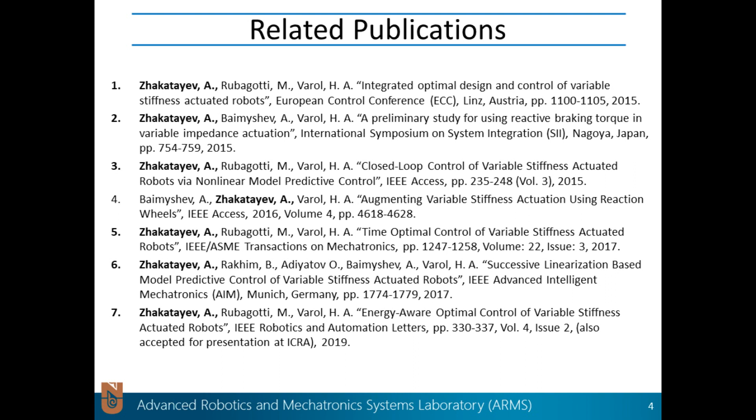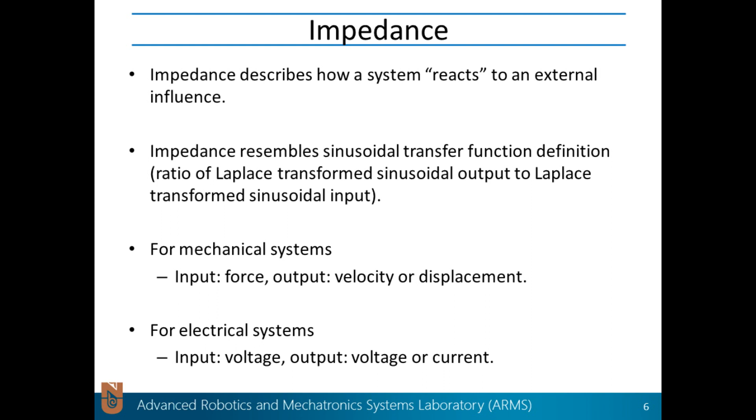So, what is impedance? Impedance in general describes how a given system reacts to external influence or input. In other words, it describes how a given system responds to external stimulus. We can say that it resembles the sinusoidal transfer function definition, similar to the ratio of Laplace transform output to Laplace transform input.

For example, if we talk about mechanical systems, then as input we might have a force, and as output we might have, for example, velocity and displacement. So if we focus on mechanical systems, then we have to define the mechanical impedance.

Let's imagine we have a mechanical system, then we apply a sinusoidal or harmonic external driving force as input. And then as a response from the system, we get a certain sinusoidal or oscillatory steady-state displacement. Then we can define mechanical impedance as the ratio of this driving force to the resultant steady-state displacement.

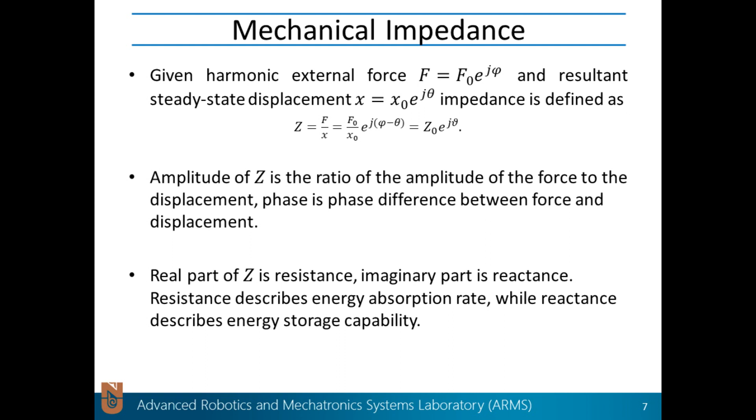In general, this mechanical impedance is a complex number, and the amplitude of this complex number is equal to the ratio of amplitudes of force to displacement, while the phase is equal to the phase difference between input force and resultant output steady-state displacement. The real part of this mechanical impedance is called resistance, and it usually describes the rate of energy absorption, while the imaginary part is called reactance and commonly describes the energy storage capability.

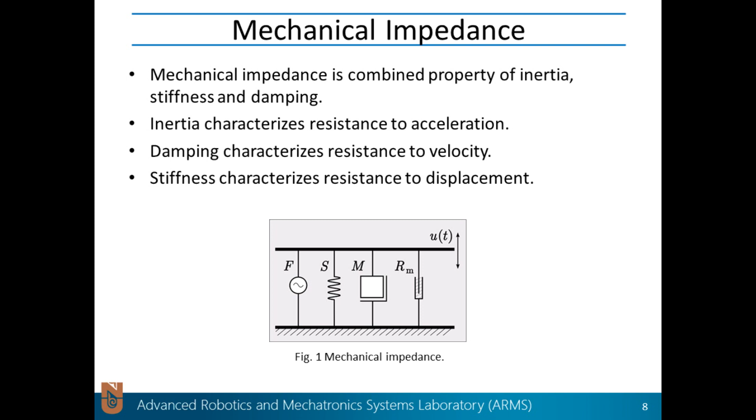Given an arbitrary or general mechanical system, the mechanical impedance is defined by the properties of inertia, stiffness, and damping of the system. In other words, these three properties together define the mechanical impedance of the system. Inertia describes the resistance to acceleration, damping describes resistance to velocity, and stiffness describes resistance to displacement.

If for a given mechanical system we can vary any of the three properties, in other words, if we can vary inertia and/or stiffness and/or damping of the system, then essentially we can vary the mechanical impedance of the system. So mechanical systems with variable mechanical impedance are systems in which any of the three properties can be varied. Currently, variable impedance actuated robots are robots in which we can alter or vary the mechanical impedance of the joints of the robot.

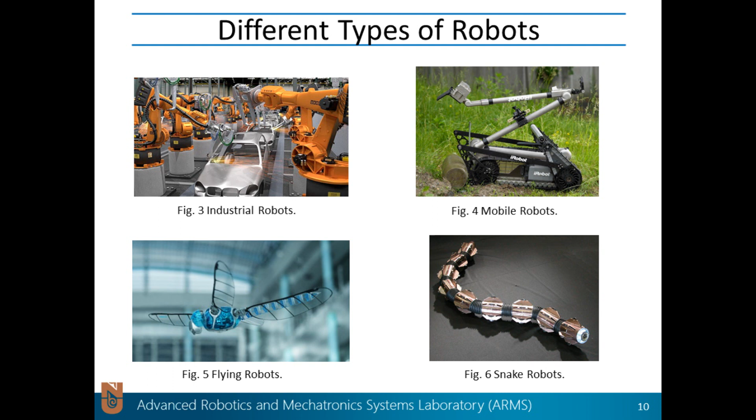Currently, we have all sorts of robots. For example, we have industrial robots, mobile robots, flying robots, snake types of robots. So we have all sorts of robots. One of the important goals of the robotics field is to design such a robot which would move with the same agility, mobility, and dexterity as humans and animals move.

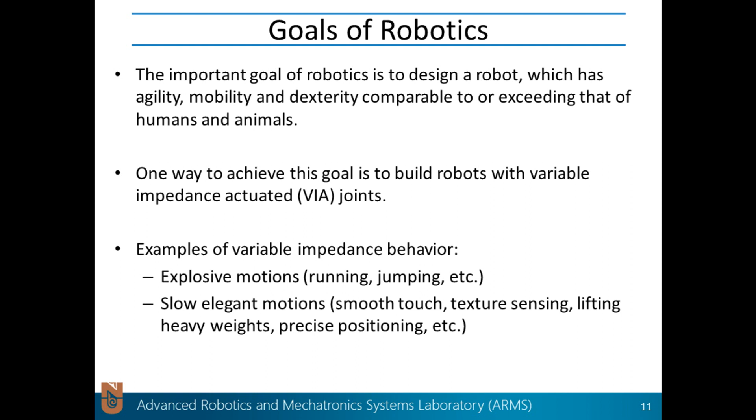One way to achieve this goal is through so-called variable impedance actuated robots or variable impedance actuated joints. Examples of variable impedance behavior include explosive motions like running, jumping, or throwing, and slow, elegant motions like smooth touching, texture sensing, and so on.

On this slide, we summarize the information about position control robots, or so-called stiff joint robots. The main disadvantages are the following: they are not safe, and they are not energy efficient. In other words, they spend energy in all parts of the motion trajectory. They are not compliant, meaning they can't vary their mechanical properties depending on the task, and they can't perform explosive motions.

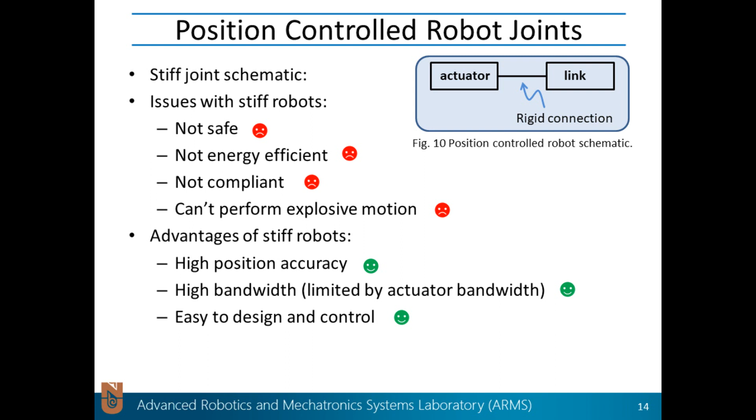While position control robots have the following advantages: high position accuracy, high bandwidth, meaning they can follow sinusoidal signals with high frequency, and they are relatively easy to design and control. Here you can see the schematic of rigid or position control robots. In these robots, the actuator is directly connected to the link through a rigid connection.

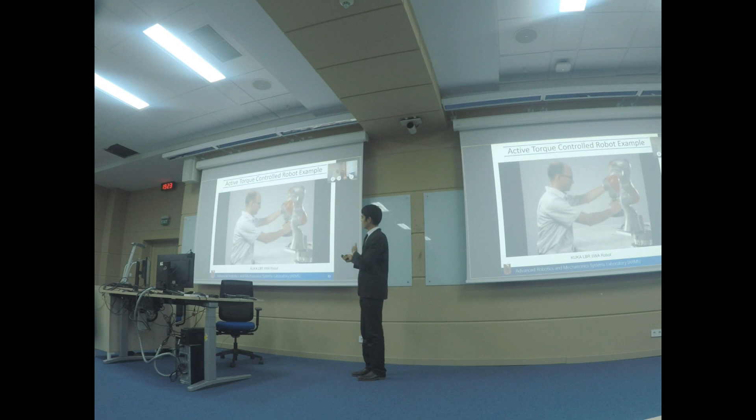This slide summarizes the main advantages and disadvantages of the active torque controlled robots. These robots are also called active variable impedance actuated robots, because the variable impedance behavior is achieved by active means, by actively controlling the force and torque through the force and torque sensors.

So these robots still have the following disadvantages: they are not energy efficient, they can't perform explosive motion, and they can also be unstable. The advanced controls usually employed in these robots can become unstable under certain rare conditions.

But these robots have the following advantages: they are now safe, they are compliant. In other words, you can program them to behave with any desired apparent mechanical impedance, and they still have high position accuracy and high bandwidth.

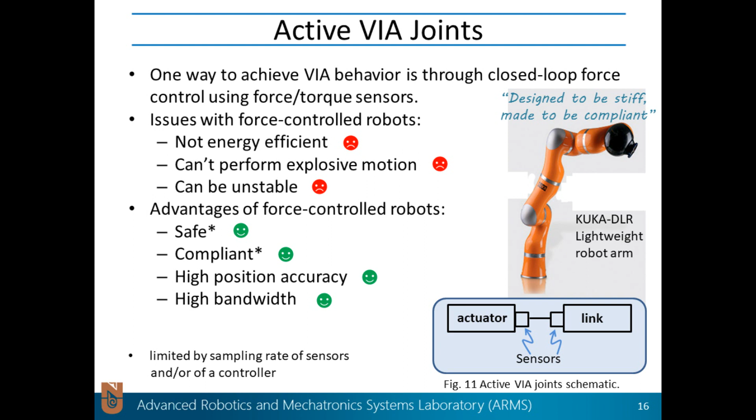This diagram summarizes the schematics of these robots. In these robots you still have the rigid connection between actuator and link, but now there are many sensors, for example acceleration, torque, and force sensors incorporated into the actuator and link, so that using the information from the sensors we can detect when a collision happens and modify the robot motion accordingly.

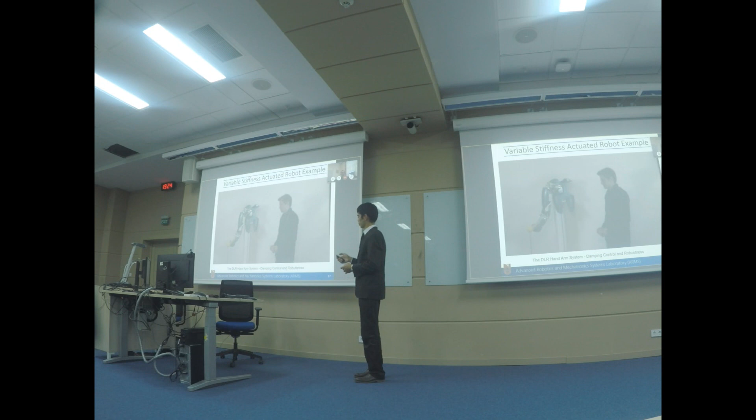This slide contains a video where we can see the advantages and unique features of the variable impedance or variable stiffness actuated robots. For example, you can see that when the robot is hit by a bat, there is essentially no damage to the robot.

Here we summarize the information about the variable impedance actuated robots. These robots are also called passive variable impedance actuated robots, because here the variable impedance behavior is not achieved by active means or by imposing that behavior. It's an intrinsic property of the joint or the robot, so it's a passive variable impedance behavior.

So these robots have the following disadvantages: they have limited position accuracy, they have limited bandwidth, and it's difficult to design and control them because you have more elements in the robots.

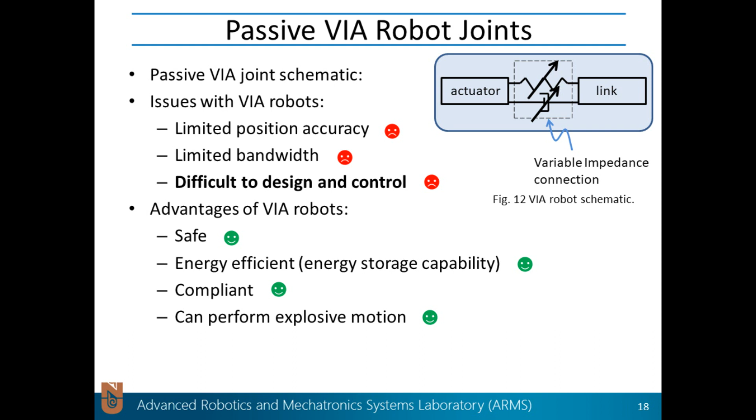So here you can see the schematic diagram of the variable impedance joints or robots. In these robots, the actuator is decoupled from the link. In other words, it's not directly connected to the link.

So again, in passive variable impedance joints, the variable impedance behavior is something which is intrinsic to them. It's kind of an internal property of these robots. It's not something which is external or imposed, as, for example, in active torque control robots. Therefore these advantages that we mentioned before are intrinsic properties of these robots, and they don't lose them if, for example, control breaks.

One of the main research directions in the robotics community is to design and control the variable impedance or variable stiffness actuated robots.

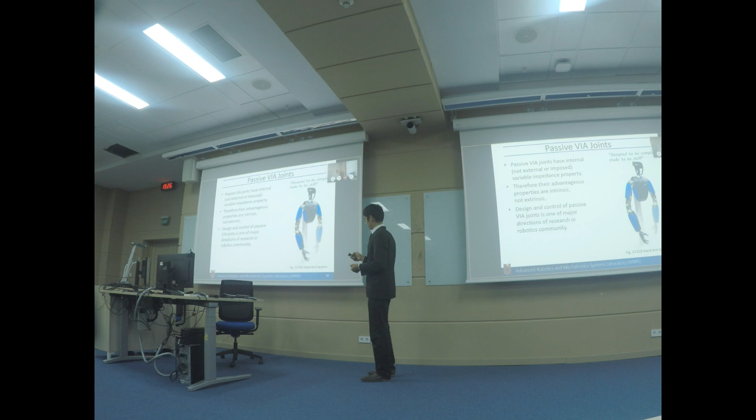Variable impedance actuated joints have application in multiple fields and areas. For example, they're used in prosthetics, in surgical robots, in designing exoskeletons, and in applications related to interaction with humans, in social robotics.

Variable stiffness actuated robots is a subgroup, or one branch of the variable impedance actuated robots. They also have the advantages of the variable impedance actuated robots. Specifically, these advantages are the following.

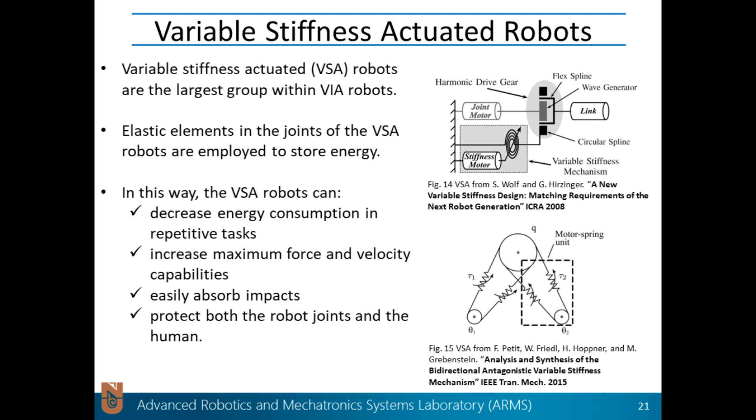Variable stiffness actuated robots consume less energy because they consume energy at one cycle of the motion. Then they can store the energy in the nonlinear elastic elements, and then release that energy at the other cycles of the motion.

Variable stiffness actuated robots have increased maximum force and velocity capabilities. Due to the energy absorption abilities, VSA robots can also easily absorb external impacts or shocks, and again due to the presence of nonlinear elastic elements, these robots can protect the robot joints and the humans in case of collision.

The variable impedance or variable stiffness actuated robots have the following kind of problems or difficulties associated with them. Firstly, design gets more complicated, due to the presence of additional nonlinear elastic and or nonlinear damping elements, and the presence of additional actuators.

Also these robots have limited position accuracy, and reduced mechanical bandwidth compared to, for example, position control robots. They also have more complex dynamics, and the parameter identification and task planning of these robots is challenging.

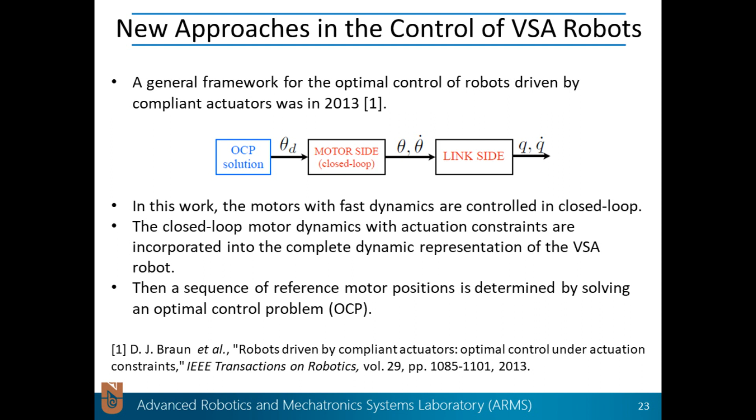A research group from Germany proposed the following control methodology to control variable stiffness or variable impedance actuated robots in 2013. They proposed to use an optimal control problem formulation. They take the system dynamics, and also the dynamics of the motor side, provide them to the optimal control problem formulation, specify the task, then solve the optimal control problem and obtain the optimal control inputs, which they feed to the system to get the desired behavior.

The control problem of variable stiffness actuated robots can be formulated as an optimal control problem, with the purpose of solving the following optimization problem: here you have the cost function J, sometimes called the objective function, then we have the system dynamics, represented through the function f, then constraints on the state x, and bounds on the input u.

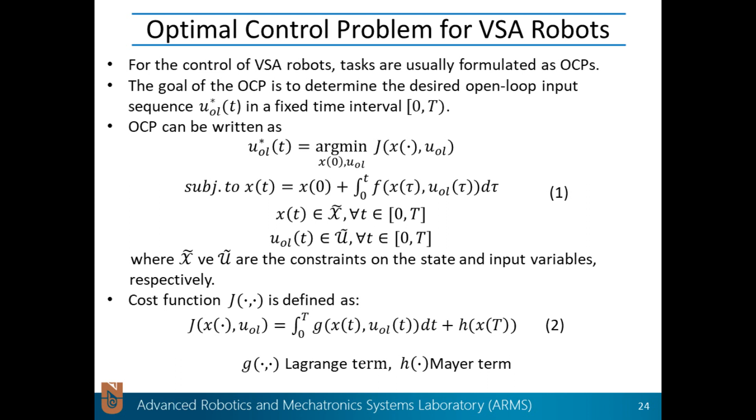Usually the cost function consists of two terms: one is called the Lagrange term, the other is called the Mayer term, which also describes a kind of end term. By solving this optimal control problem, we can obtain the optimal control inputs to the system.

Our approach to control variable impedance or variable stiffness actuated robots is the following. We propose to use the model predictive controller to close the loop, controlling these robots in a closed loop manner. The MPC controller takes information about the current state of the system, and we provide it with the solution from the optimal control problem as a reference. Model predictive control compares the current state with the reference state, then recomputes the optimal control inputs and feeds them to the system. This way, we achieve closed loop control.

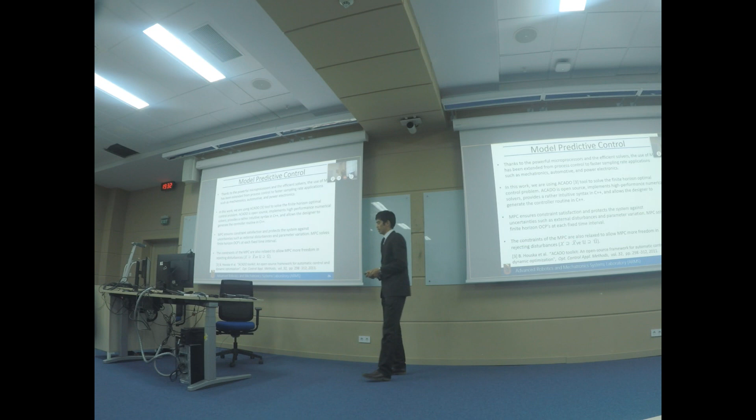Model predictive control was first developed in the chemical industry, and it was firstly applied to chemical processes. But due to rapid advances in microprocessors and electronics, now we can use model predictive control for processes with fast dynamics, such as aerospace, mechatronics, automotive, and power electronics applications.

In this work we used the ACADO toolkit, which is open source code to solve optimal control problems and to generate the model predictive controller. It has easy syntax in C++.

The main advantage of MPC is that it satisfies the system constraints, and it tries to get the system behavior as close as possible to its reference trajectory. Usually for MPC we have to relax the constraints compared to OCP, optimal control problem, so that it can reject disturbances.

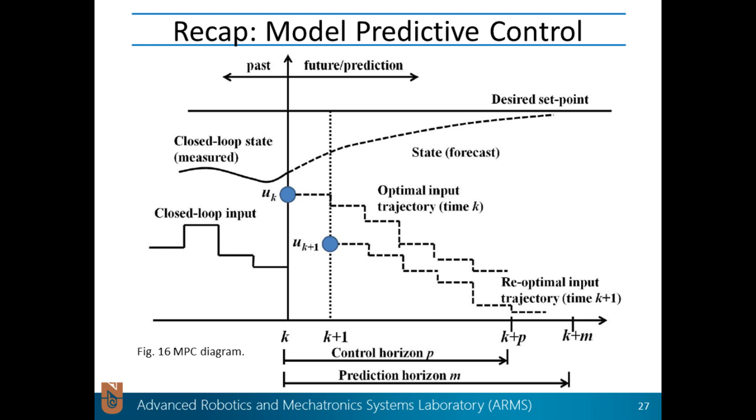It computes, within a limited horizon duration called the prediction horizon, the behavior of the system. Then, based on that, it calculates the optimal control inputs which would try to bring the system as close as possible to the desired reference trajectory. It computes these control inputs usually for the control horizon duration, and then we give just the first optimal control input to the system. Then we move to the next sampling time, where this process repeats. So essentially, MPC at every sampling time recomputes the optimal control inputs.

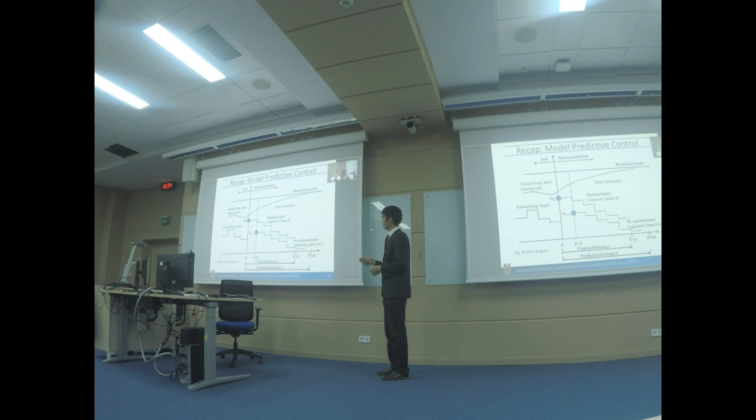So how do we describe the dynamics of variable impedance or variable stiffness actuated robots? Usually for traditional rigid robots or position controlled robots, we just model the dynamics of the link side, while the dynamics of the actuator is usually lumped into the dynamics of the link side. So inertia and other properties of the actuators are lumped or incorporated into the properties of the link.

While for variable stiffness or variable impedance actuated robots, we have to decouple them, we have to consider them separately. So we have one equation which describes the dynamics of the link side, then we have another set of equations which describe the dynamics of the actuators. So we have essentially two different sets of dynamical equations, which describe respectively the dynamics of the link and actuator side.

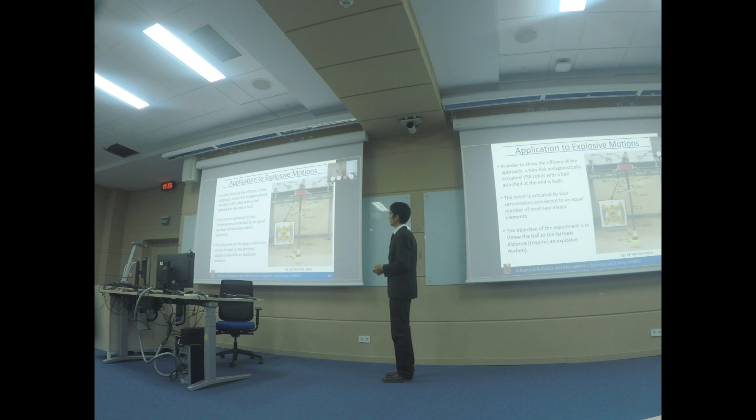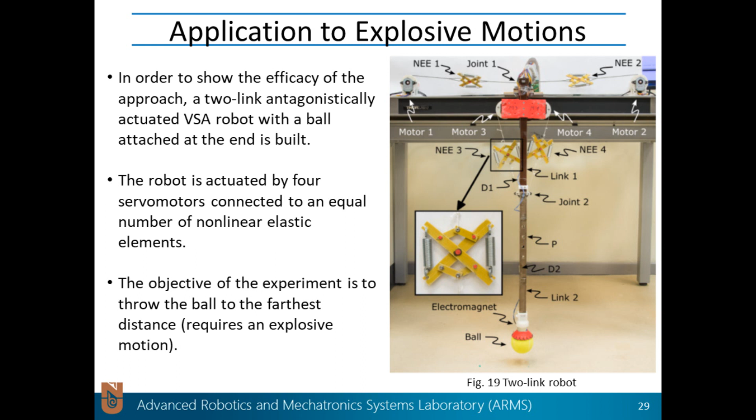In order to test the efficacy of our proposed approach, we built the following two-link variable stiffness actuated robot. The robot consists of two links, 4 position-controlled motors, 4 nonlinear elastic elements, and 6 encoders. Each actuator is connected to the links with a nonlinear elastic element, and the objective of the robot is to throw a tennis ball, attached at the end effector, to the farthest distance possible.

Then we formulate the optimal control problem for the duration of 4 seconds. This OCP was solved in 16 minutes, with a sampling time of 10 or 20 milliseconds.

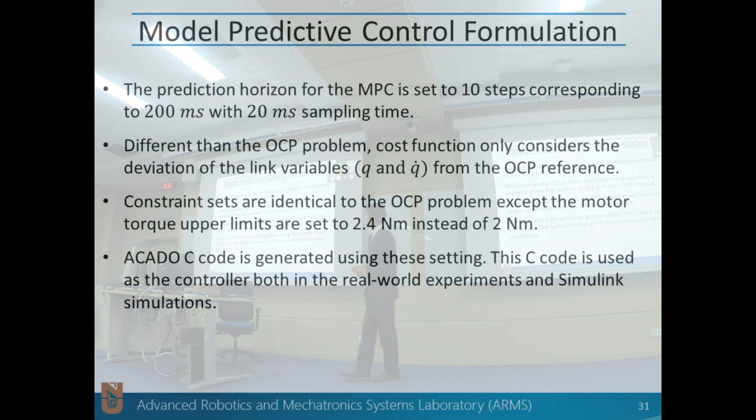Then we generated the model predictive controller, and for that we set the sampling time to 20 milliseconds, and we set the horizon time to 200 milliseconds. So we had 10 sampling times within the prediction horizon.

We slightly enlarged, or slightly relaxed, the constraints on the system. For example, we slightly increased the torque limit for the motors, and then we generated the MPC controller using ACADO C code. We also provided as a reference to the MPC only link position and velocities - we didn't provide any actuator link positions and velocities as a reference.

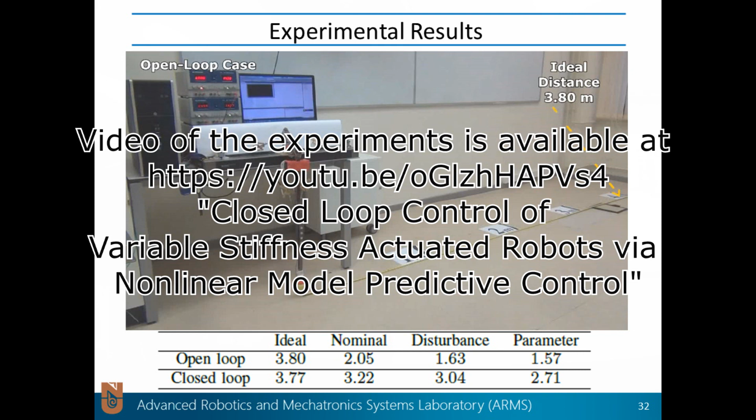So on this slide, you can see the video of the experiments that we performed in the lab, and here you can see the actual distances that we achieved. In the open loop scheme, in the ideal case in simulations, we would achieve a throwing distance of 3.8 meters, while in closed loop we'd achieve a distance almost close to that - only 3 centimeters less.

Then in the actual experiments, in the nominal case, in the open loop case we obtained a throwing distance of 2 meters, while in the closed loop we obtained a throwing distance of 3.2 meters, which is much larger than the open loop case. Then we performed additional experiments where we applied external disturbances and changed the parameters of the system. In both cases, the closed loop controller with MPC outperforms the open loop controller.

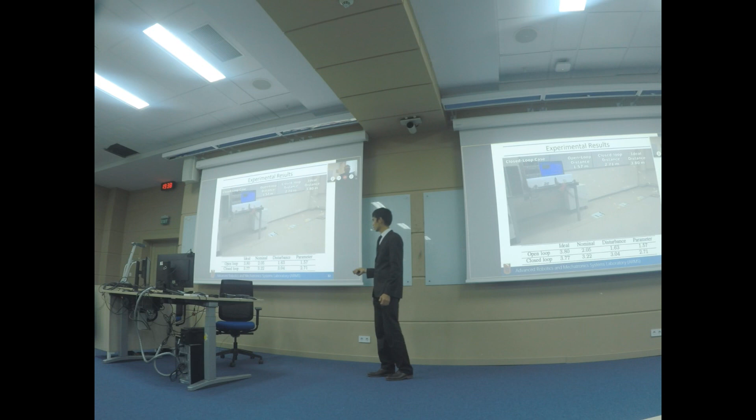But of course, we can apply MPC to the control problem of variable impedance actuator robots only if it satisfies the following condition: the MPC should be able to solve the finite horizon optimal control problem within the sampling time.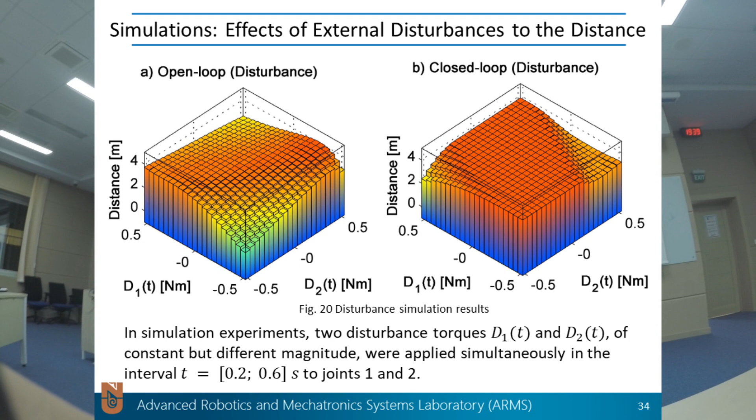As external disturbance, we used an external torque in simulations. You can see that in most cases, the closed loop controller compensates the effect of the external disturbances, and only in extreme cases does its compensation fail. But in the open loop case, only at specific values of the external disturbance does the system performance not degrade - in all other cases it degrades.

Similarly, we perform simulations for the parameter variation case. In other words, we vary the parameters of the system so that the controller had different system values for the system parameters than the system in simulation. So we obtain the following plots.

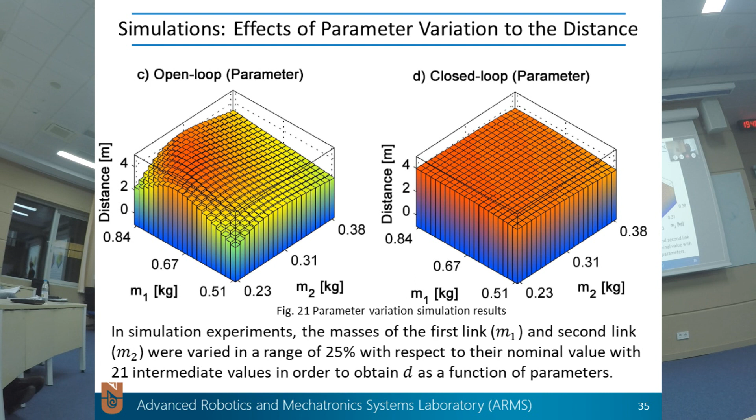Here you can see the open loop and closed loop system performance when parameter variation of the system takes place. You can again see that the closed loop controller, in most cases, manages to compensate the effect of the different values of the system parameters, while the open loop controller cannot do that.

The next task that we considered was related to the integrated optimal design and control of variable impedance actuated robots.

Usually, the design and control problems of systems are considered as separate or decoupled problems. For example, designers design a system and then provide it to control engineers, who try to make it controllable. But system design usually affects the controllability properties of the system, and controllability in turn might affect the design. In other words, control and design are coupled problems and should be considered together.

Traditional design methods don't allow considering these two problems together, so usually the design process is iterative: engineers design the system step by step, trying to improve it at each stage. But this process doesn't guarantee that at the end we get the optimal design. So we propose to solve the optimal design and control problem together using optimal control problem methods, which we call the integrated optimal design and control problem.

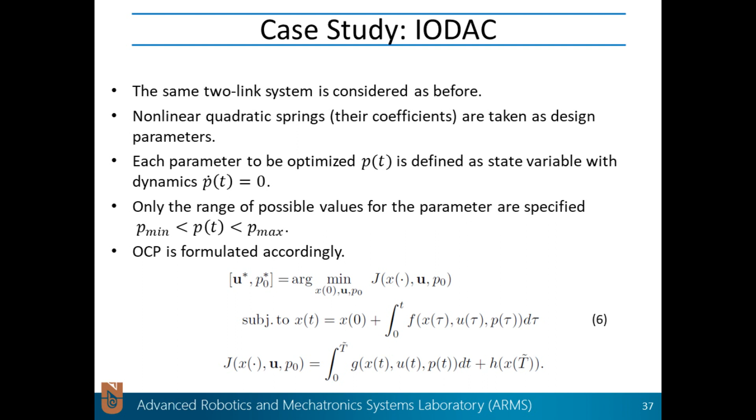As a case study for this task, we considered again the two-link variable stiffness actuated robot. For this simulation, we considered the nonlinear elastic elements as quadratic springs, with the constant considered as a design parameter. To find the optimal values for these design parameters, we imposed the following conditions: these parameters are states of the system whose time differential equals zero, so they're constant, but their initial value is unspecified—we just set it within a certain interval—and then formulated the following optimal control problem.

Here our cost function is a general cost function, but it now also contains the parameters to be optimized, P. Then we have the system constraint, the system dynamics.

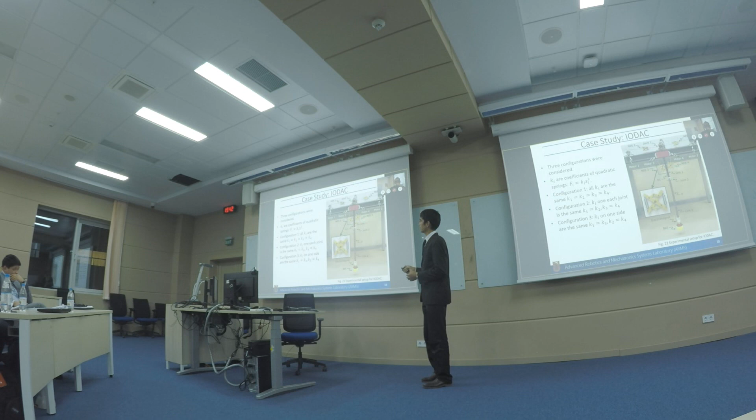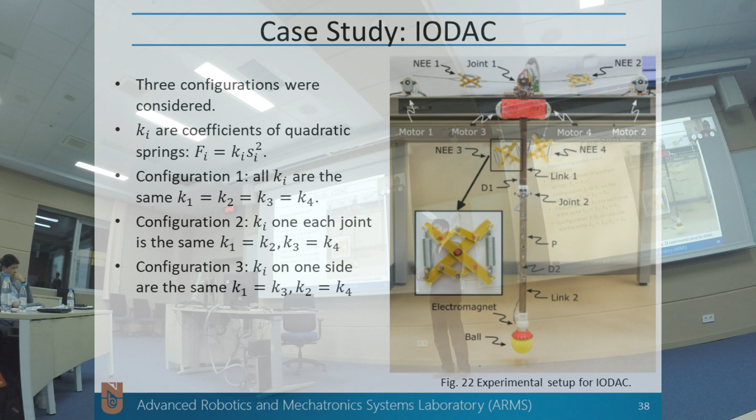As a case study for this task, we considered the two-link system, assumed to have quadratic springs, and we considered three different configurations. In the first, all quadratic springs were equal, so the coefficients were the same. In the second, the quadratic springs on one joint were the same but different from those on the second joint. In the third, the quadratic springs on one side of the robot, for example the right side, were the same but different from those on the left side.

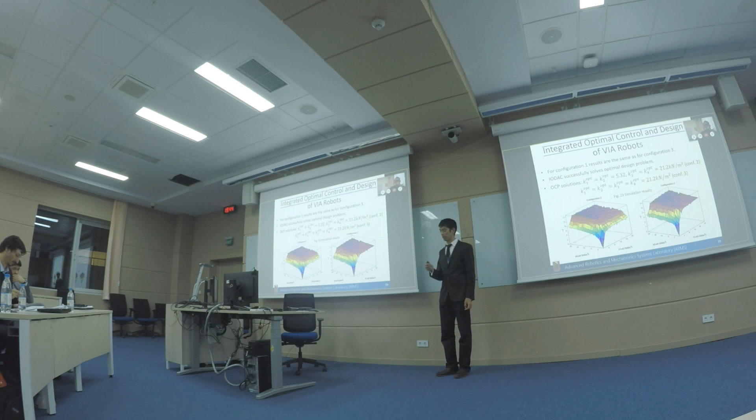The next project we considered was related to the reaction wheel integrated variable impedance actuator robot. Reaction wheels are commonly used in the aerospace industry, for example in satellites, to control and stabilize attitude, and they are also considered additional torque and energy sources. So we propose to incorporate reaction wheels into variable impedance actuator robots in order to increase force and torque capabilities and to increase bandwidth.

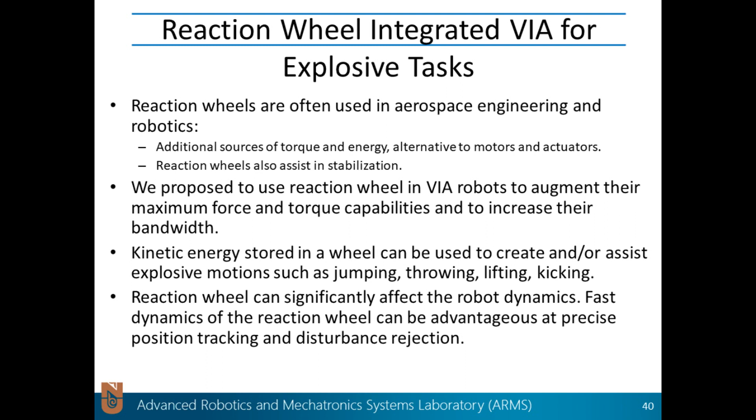This is due to the fact that reaction wheels store kinetic energy and can then release that energy, which is very helpful in performing explosive motions such as jumping. Reaction wheels also have fast dynamics, so they can assist variable impedance robots in precise position tracking and in disturbance rejection.

In order to test our control approach, we imposed the following task for the robot: to throw the ball to the maximum possible distance. We performed experiments for 3 different times, as you can see from the table. Robot motion was imposed at 1 second, 1.5 seconds, and 2 seconds, and here you can see the distances that we achieved.

You can see that the reaction wheel with variable stiffness actuated robot together, the two systems combined, give the maximum distance in all cases, while the VSA only case and reaction wheel only case give lower distances.

For example, from this diagram you can see that as the time of motion of the robot is increased, the thrown distance of the ball also increases, but then it saturates. These results confirm that reaction wheels enhance the dynamics of variable stiffness, variable damping, or variable impedance actuated robots.

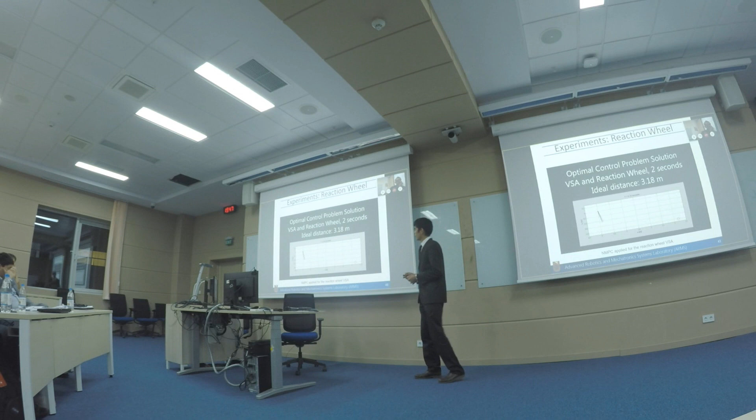On this slide, you can see the video of the experiments that we performed for this reaction wheel augmented variable stiffness actuated robot.

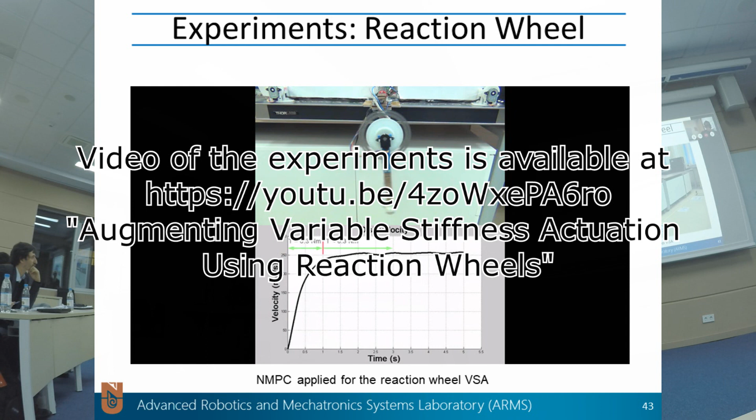The next task that we considered was related to time optimal control of variable impedance actuated robots. Often in industry, it's necessary to perform a certain task in the shortest time possible, or minimum time possible. The control sequence which would minimize the time of motion usually involves trial and error, an iterative process.

But we propose to use an optimal control problem to solve this time optimal control problem. Our approach takes into account the system dynamics and the constraints of the system, so that the time optimal control problem is solved without violating the system constraints.

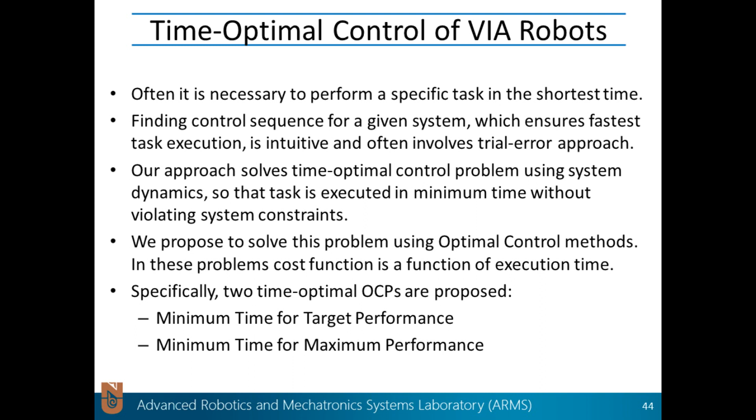Specifically, we propose two time optimal control problems: one is called minimum time for target performance, and another is called minimum time for maximum performance.

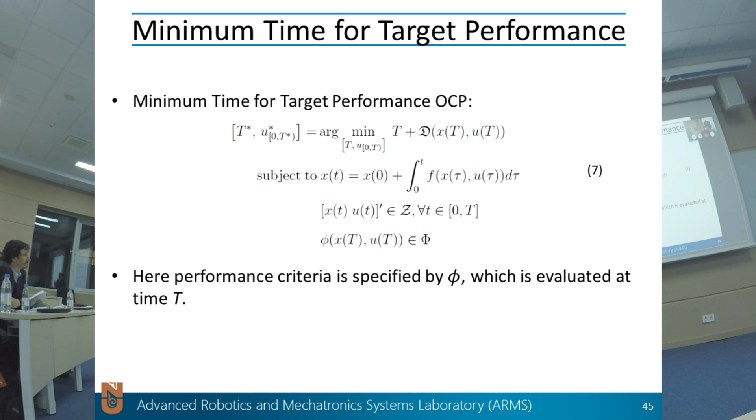For the minimum time for target performance optimal control problem, we have the following problem formulation. As the cost function, we have time of motion plus any function of the system states at the last moment of, for example, robot motion. Then we have the system dynamics, constraints on the system states and control inputs, and a constraint on system performance, specified by the letter phi. Performance criteria is imposed as a constraint of the system.

In other words, we just maximize the system performance, and then in the next sub-problem we want to achieve a performance which is maximum or slightly less than maximum but close to it, while minimizing the time of motion. So minimum time for maximum performance is achieved by solving two suboptimal control problems: first maximizing the performance, then minimizing the time of motion while imposing the performance as a constraint.

We introduce the tolerance parameter delta, which accounts for errors of computation or sometimes the tolerance of the system. This minimum time for maximum performance optimal control problem can be solved by the time axis grid method, which applies to any time optimization problem, or by the bisection method, though this is only valid for systems in which performance is a non-decreasing function.

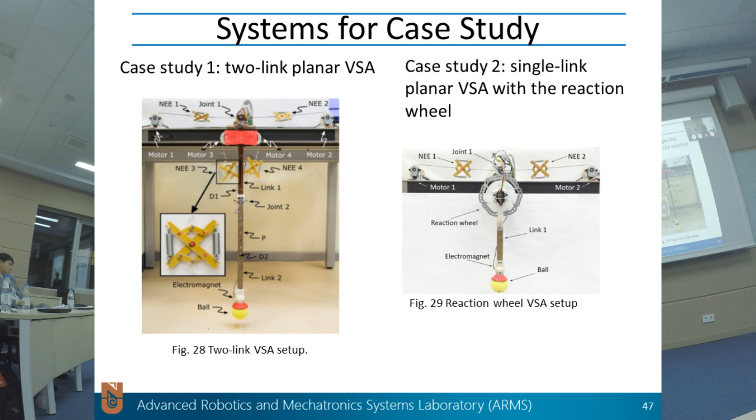As a case study for this task, we used two different systems. The first system is the two-link variable stiffness robot, and the second system is the single-link variable stiffness robot with the reaction wheel.

You can see that for three different set values for ball thrown distance, we have the corresponding times. T gives the time of robot motion, and D gives us the time of flight of the ball after the system throws it and before it hits the ground. Then we have the combined times. On the lower side, you can see the diagram of the two-link trajectories and the corresponding velocities.

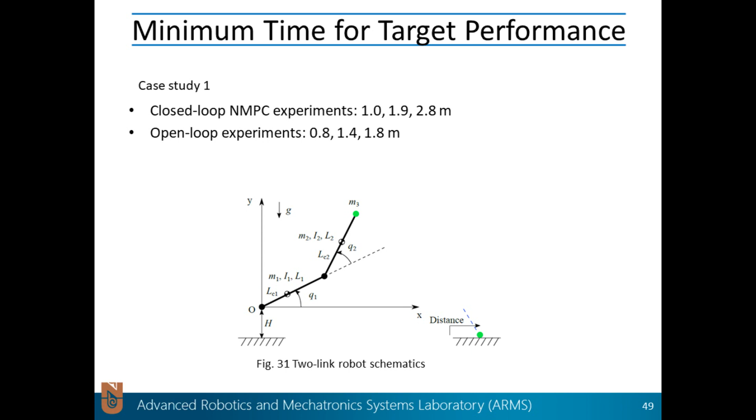Here we present the results of simulations for minimum time for maximum performance optimal control problem for two systems: double link system and a single link reaction wheel system. This problem was solved by two methods for each case study. One method is a time axis grid method, the other is bisection method.

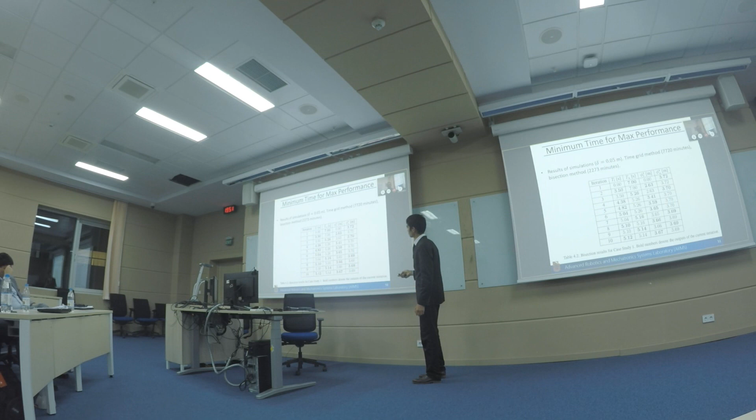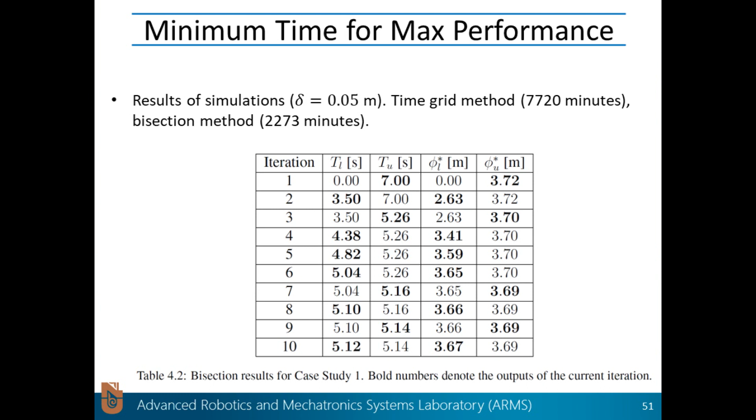On this slide, you can see the results of the bisection method applied to solve the minimum time for maximum performance problem, applied for case study 1, the double link system. With bold letters, we indicate the solution of the current iterative step. You can see that within 10 iterations, we get the optimal value for the minimum time.

The next task that we considered was the energy optimal control of variable impedance actuated robots. In most applications in industry, it's desirable to reduce energy consumption. Commonly, the reduction in energy consumption or energy efficiency is achieved by trial and error approach. We propose to use an optimal control problem to solve this energy optimization, ensuring that system constraints are satisfied.

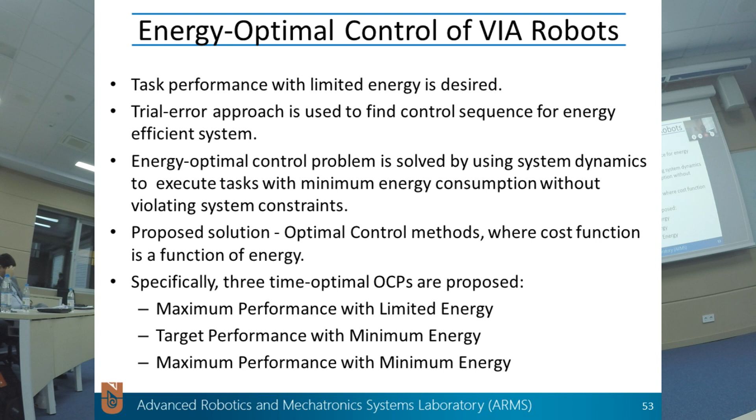Specifically, we formulated and propose to solve three different energy optimal control problems. One is maximum performance with limited energy, another is target performance with minimum energy, and the third one is maximum performance with minimum energy.

In order to calculate the energy consumption, we formulated the power equation, or the power consumed by the robot. Power in general consists of two terms: one is power consumed spent on resistance, which is basically lost power, and another is the power spent on moving the links. The total energy consumed is equal to the time integral of the power.

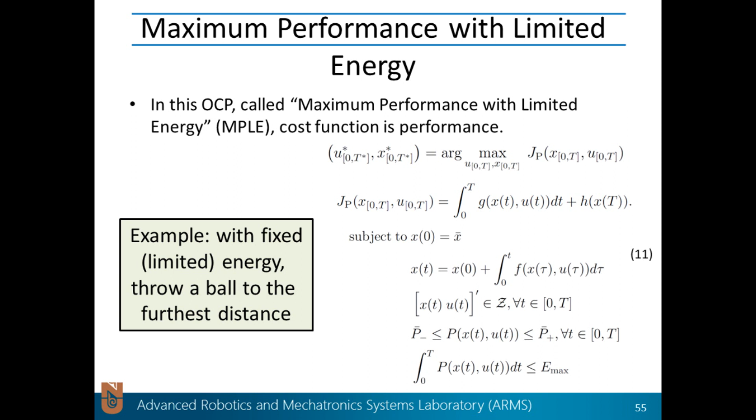The first energy optimal control problem that we formulate is called maximum performance with limited energy, or MPLE. In this optimal control problem, as a cost function, we have the performance function, meaning we want to maximize the performance of the system. We also have the system dynamics, the constraints on states and inputs, the constraint on the power, and the energy consumption of the robot as one of the constraints. In other words, we want to maximize performance but have a limitation on energy consumption as one of the constraints.

The second energy optimal control problem is called target performance with minimum energy, or TPME.

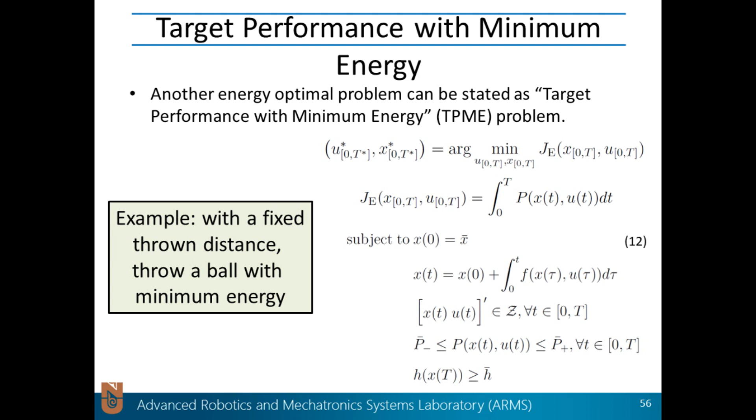In this optimal control problem, we have as cost function the energy consumption, but as a constraint we have the performance criteria. In other words, we set performance of the system as one of the constraints. We want to minimize energy consumption while keeping system performance as one of the constraints.

The third energy optimal control problem that we defined is called maximum performance with minimum energy, or MPME. In this optimal control problem, we actually have to solve two suboptimal control problems.

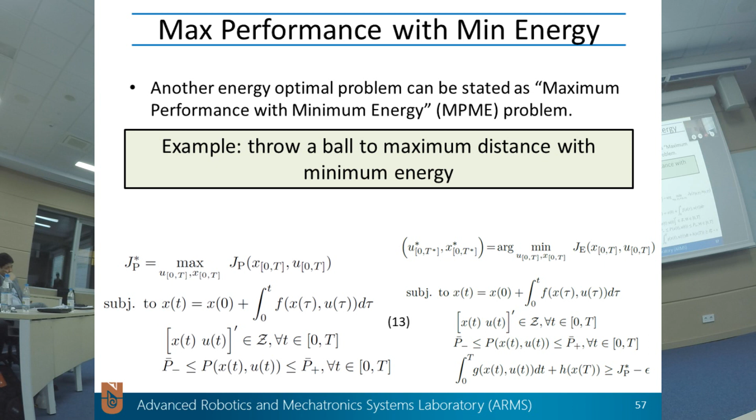In the first suboptimal control problem, we want to maximize the performance without any energy limitations. In the second suboptimal control problem, we want to get the maximum value of performance obtained from the first problem, but minimize the energy while keeping that performance criteria close to or equal to the maximum performance, setting this performance as a constraint.

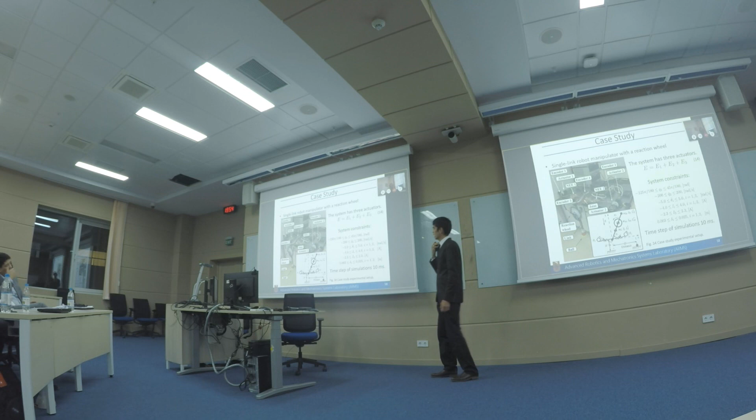As a case study for this task, we considered a single link reaction wheel variable stiffness actuator robot. This robot has 3 actuators, so our total energy consumption consists of 3 energy terms, one for each actuator. We have the following system constraints, and the sampling time of simulations and experiments was 10 milliseconds.

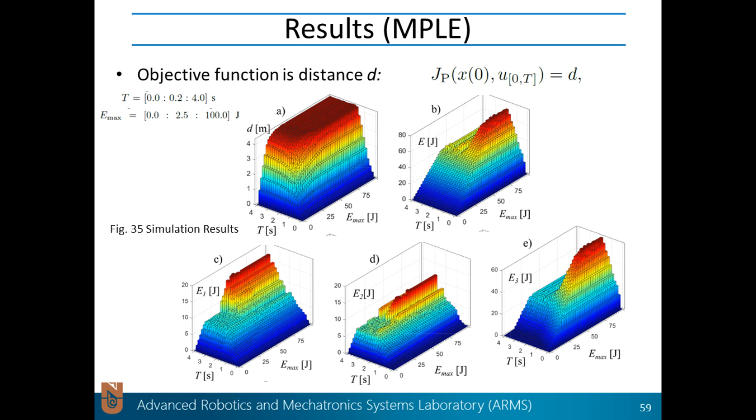You can see that the total energy spent has high values at small times of robot motion. In other words, when we impose tight time constraints, the robot consumes a lot of energy to achieve the desired distance, which is expected.

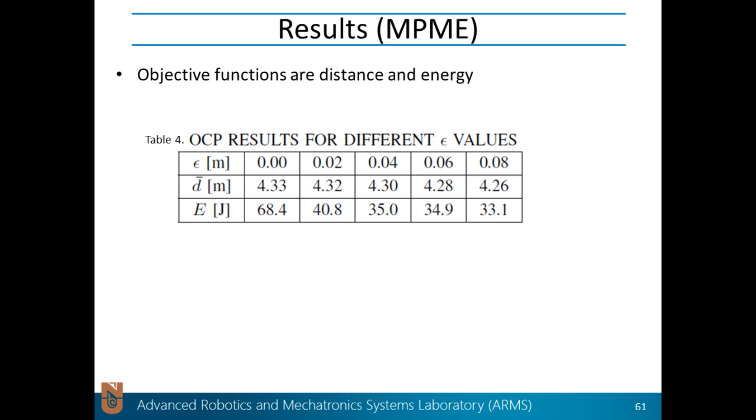Introduction of the tolerance criteria is useful, because if you set this tolerance criteria to 0, meaning we just want to maximize the distance, our energy consumption is large. But if we slightly increase the tolerance criteria, the distance reduces slightly, but it gives us a lot of energy savings.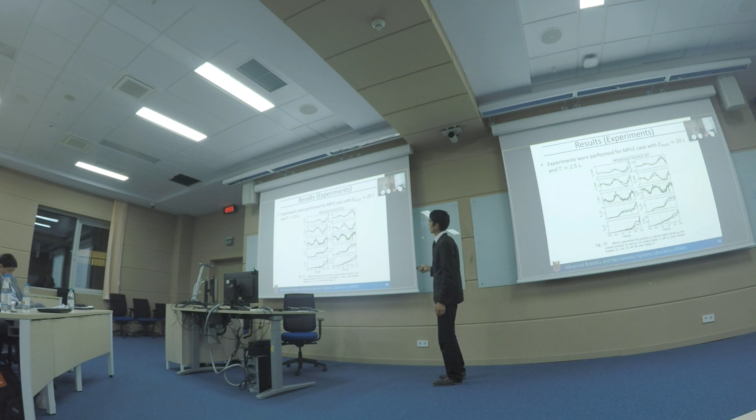On this slide, you can see the results of experiments performed for open loop and closed loop systems, for the maximum performance with limited energy optimal control problem. Here we set the maximum energy allowed to 20 joules and the time of robot motion execution to 2.5 seconds.

The next problem we considered was related to successive linearization-based MPC. For highly nonlinear dynamic systems, using a nonlinear model predictive controller results in large sampling times because of the highly nonlinear dynamics. An MPC controller takes a lot of time to solve the finite horizon optimal control problem, so we have to increase the sampling time.

How can we reduce the sampling time? One way is by linearizing the nonlinear model at the current state of the system, and then using the linearized model.

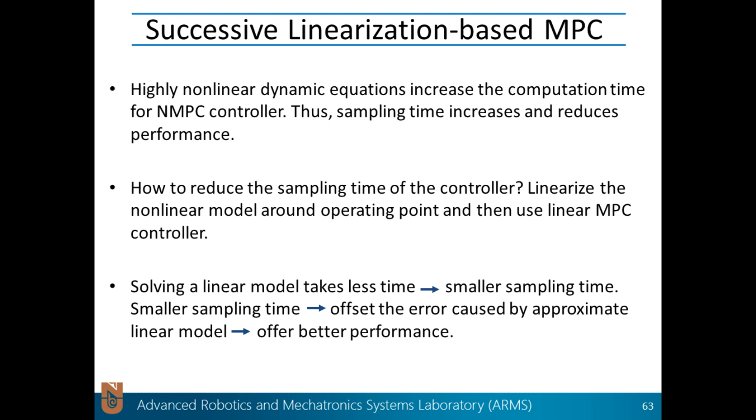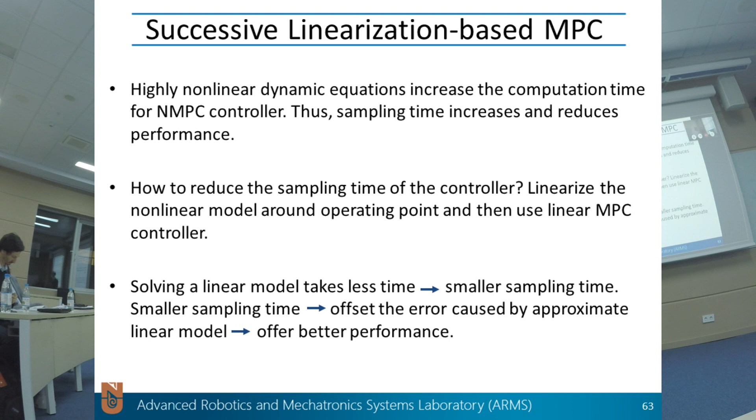But of course, when we linearize the model, we introduce certain errors to the system. But because we use a linearized model, we can use smaller sampling times to solve MPC, and because of that, we can negate the effect of errors introduced by linearization.

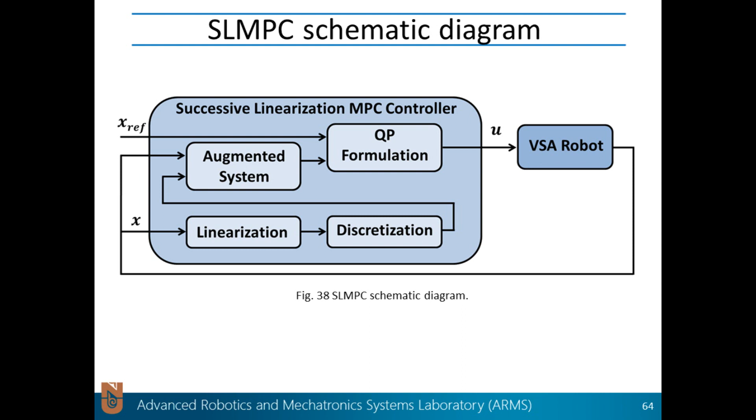This slide shows the schematic of the control that we propose. First we take the current state of the system, then we linearize it, then we discretize it, then we formulate the augmented model of the system, and give it to the quadratic programming formulation. Then we solve the QP problem and find the optimal control inputs, which we feed to the variable stiffness actuator robot.

As a case study for this task, we consider a single link variable stiffness actuator robot with a reaction wheel. We formulated successive linearization-based MPC for the task of tracking the reference trajectory for the link, and solved SLMPC using the QPOASES open source quadratic programming solver. We set the horizon length to 200 milliseconds with a sampling time of 10 milliseconds, so we had 20 steps within the horizon duration. We did simulation experiments with a reference trajectory that had a duration of 16 seconds.

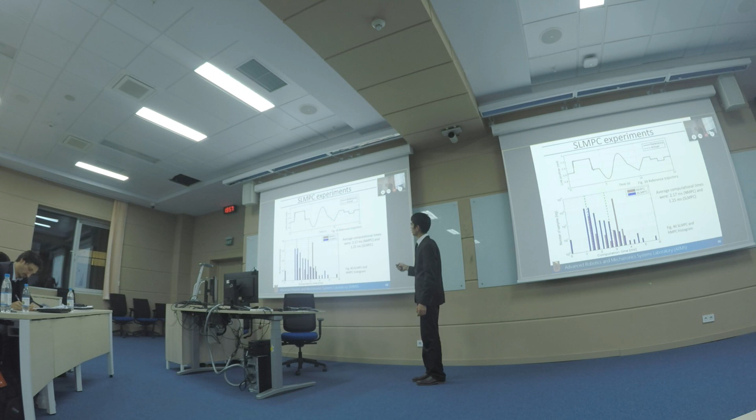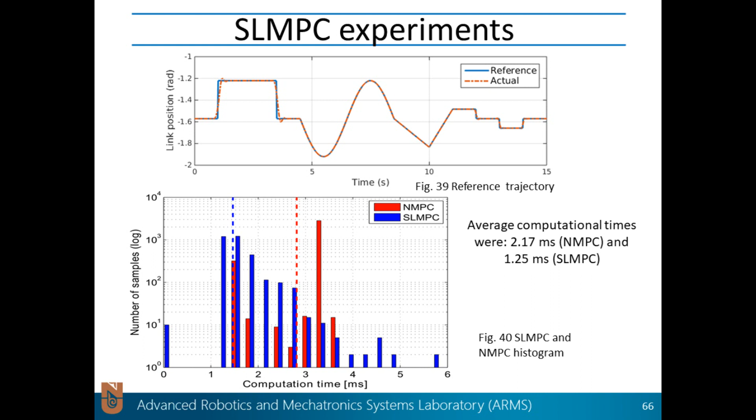Here you can see the results of the successive linearization-based MPC experiments. On the top figure, you can see the reference trajectory for the link and the actual trajectory achieved during the experiments. On the bottom, you can see the histogram of solving times for the quadratic programming problem by SLMPC and by NMPC. The average time to solve the optimal control problem by NMPC is around 2.1 milliseconds, while for SLMPC it's 1.25 milliseconds. So on average, SLMPC is almost twice as fast as NMPC.

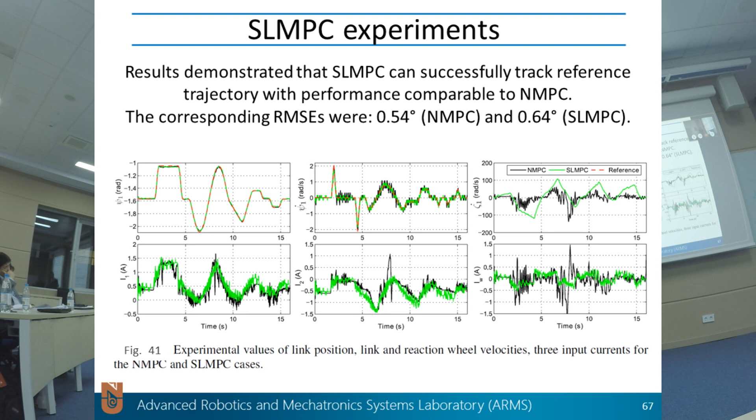But there are certain cases where SLMPC takes much longer than NMPC. On this slide, you can see the results of the experiments performed using NMPC and SLMPC controllers. Both of them track the reference trajectory pretty well, but if we compute the root mean squared error, NMPC performs slightly better than SLMPC, though the difference is small.

So let us summarize the advantages of using the nonlinear model predictive controller to control variable impedance actuator robots in a closed-loop manner. Firstly, NMPC is aware of system dynamics, which might lead to better performance. The second advantage is that NMPC takes into account system constraints and bounds, so as a result it will not push the system outside of its capabilities or limits.

NMPC is also independent of specific VIA design, so the only thing we need to change when applying it to a different system is the system dynamics. NMPC is also independent of the task, so just by changing the cost function we can apply it to different tasks. NMPC is optimal, so at least it gives suboptimal control inputs, and it ensures the optimal system trajectory, trying as much as possible to make the system behave as we want.

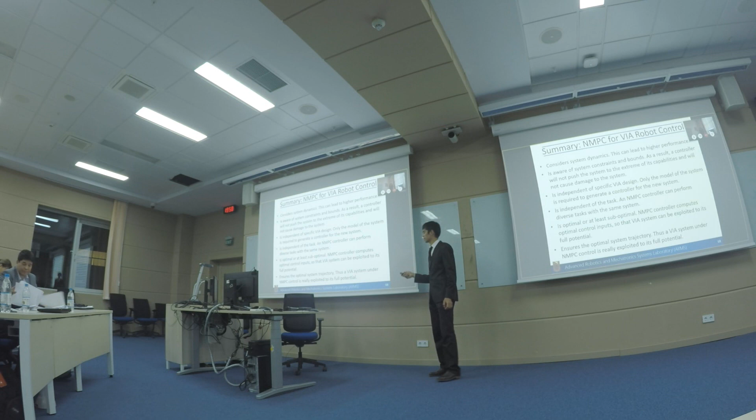But of course, NMPC also has limitations. The main limitation is that it's limited by computational power. In other words, in order to implement NMPC on real systems, we have to ensure that computationally it can solve the optimal control problem within the sampling time.

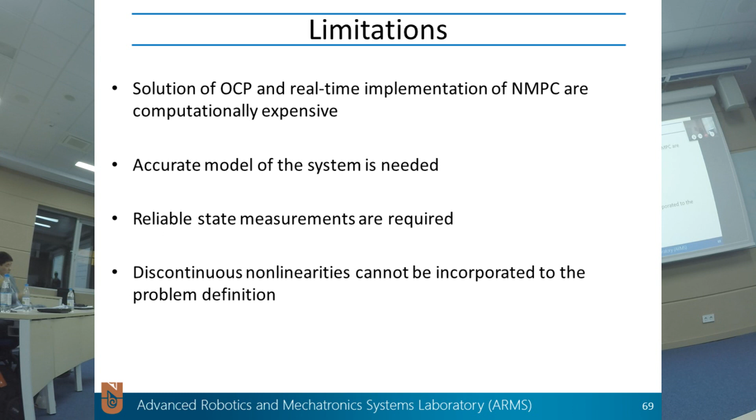NMPC requires an accurate model of the system. Another disadvantage is that it requires information about the current state of the system, so reliable sensors have to be used. And another disadvantage is that discontinuous nonlinearities cannot be incorporated into NMPC.

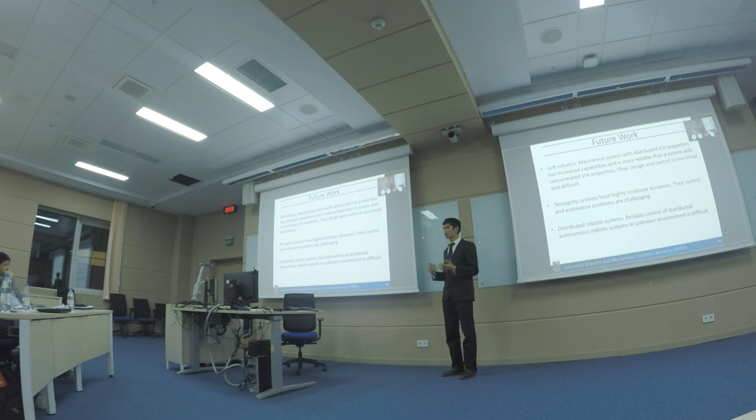As future work, we have the following possible directions. One is soft robotics, in other words mechanical systems with distributed variable impedance properties. They have increased capabilities, but of course the design and control is difficult and non-trivial, so we might apply NMPC to these systems.

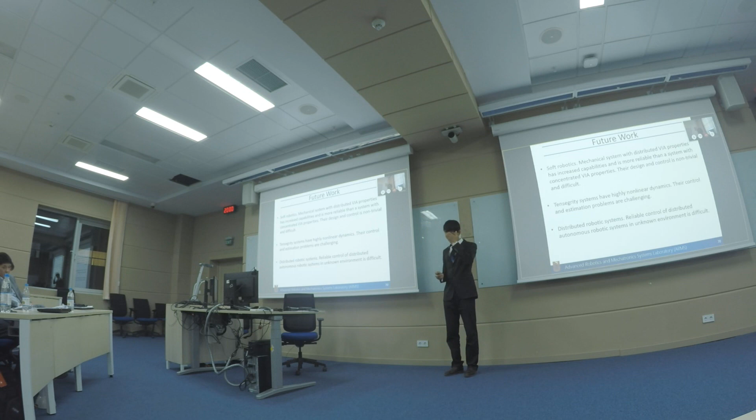Then we have tensegrity systems, which have highly nonlinear dynamics and many constraints, so control and parameter identification are very challenging and difficult tasks. And then we might apply NMPC to distributed robotic systems, such as distributed drone systems in an unknown environment, and so on.